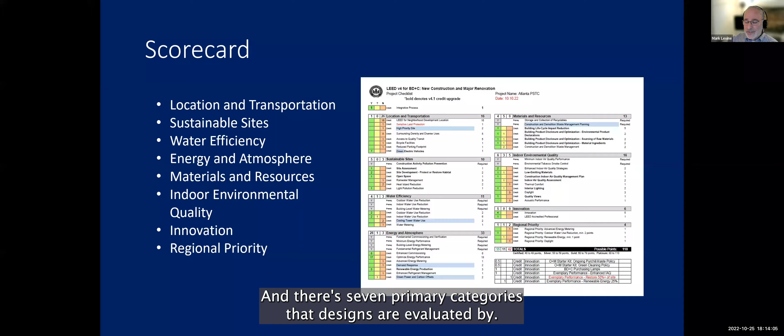Our project is going to be registered with the U.S. Green Building Council, and it follows a prescriptive process that includes a project checklist, which you see here on the right. There are seven primary categories that designs are evaluated by. It's a totally comprehensive approach to design that encompasses everything from site development to indoor air quality. There are four categories of certification: LEED Certified, LEED Silver, Gold, and Platinum. We're going to touch on some of these seven categories in the presentation tonight.

We go through a fairly meticulous process, and it begins with a series of what we call charrettes, which is really a fancy architect word for design session. During these sessions, the team determines priorities from the owners' and users' perspectives, and we set a path forward to achieve the desired results. Here's a picture of our initial goal-setting charrette, led by Lane Adams, who is LS3P's sustainability leader. The meeting included representatives from the city, the foundation, and the entire consultant team.

So at this point, I want to turn it over to Bob, and he'll talk about the process of design leading to where we are today and today's master plan.

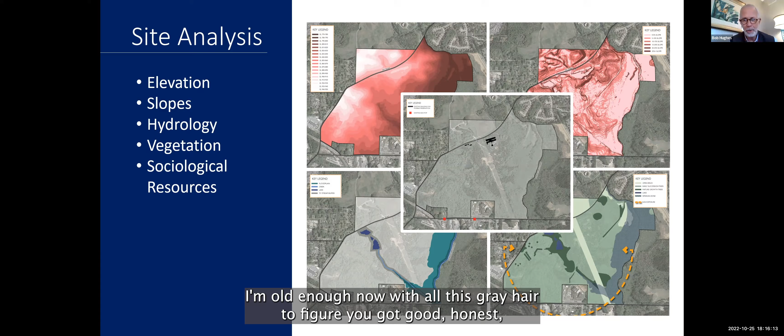Bob: Thanks, Mark. I'm going to take us back to one of our early meetings where we presented this work. I want to remind us how starting with a sustainable attitude, really starting with the earth we're building on and working with that land, has helped shape the plan. In addition, there's the sociological resources, the community itself, and how your input has helped shape this plan. It's a combination of knowing what we're dealing with the land, being open, frank, and honest in our communications, and looking for the best answer. I think over time, with good, honest, working people and good, honest communications, you're going to come up with the best answer, wherever that comes from.

So we looked at the slopes, we looked at elevation change, the cultural resources, hydrology in the lower left, and the types of vegetation that was on the site, from the nicer hardwood to the invasive species to riparian zones down by the river, the creek, all of these things that we looked at and put them together.

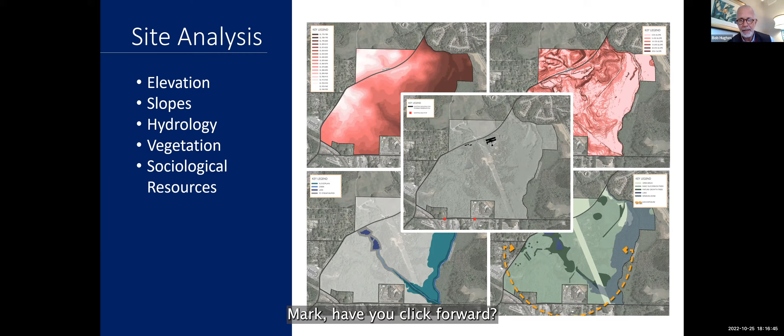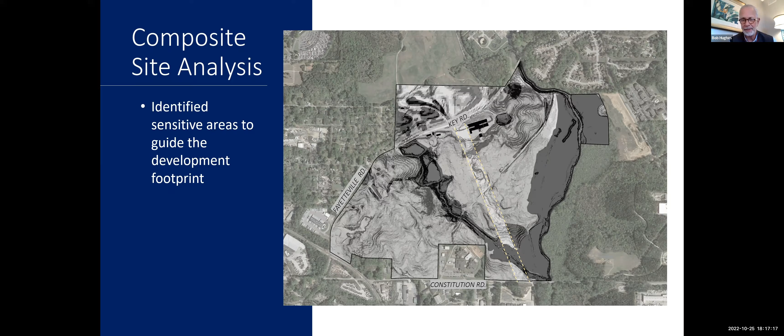Mark, if you click forward, recall this comprehensive analysis where each component, steepness of slope, type of vegetation, is ranked from least vulnerable to most vulnerable. Where they get the darkest in this overlay system, it represents the most environmentally sensitive parts of the property. So it's a very simple roadmap that says try and preserve as much of this as you can and build as much as you can in the lighter areas.

So we took the early conceptual plan that was done several years ago, and we said now that we have real topo and real information, let's lay it over the top of that. And if y'all recall, we were all over the place, up and down hills, into some nice areas. So we took that concept and said, how does that change and bend with the information we have now? How are we guided by that site?

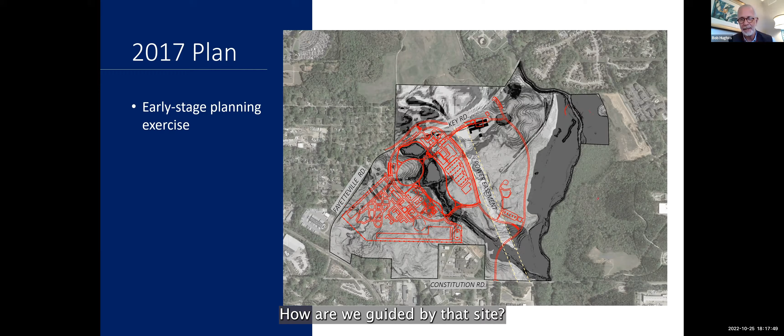So the next thing we did was say, you know what, we can begin to change this to fit more like this and be away from the sensitive areas, preserve the steeper slopes, the better vegetation, the cultural resource components to it.

But one of the things y'all asked us as we did this is, why do you really need to come across off Key Road? There's an issue of traffic that, quite honestly, we hadn't really focused on the way y'all were asking us to focus on it. And we said, I don't know, let us look at it.

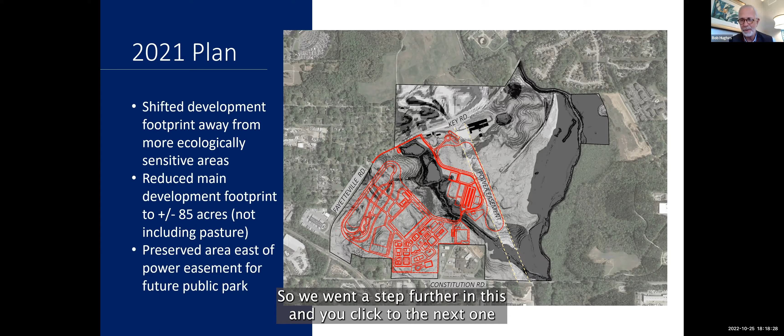And so we went a step further in this. And we modified it all again, where the stables, that Mark will talk about in a little bit, are kind of picturesque up on Key Road itself. And the main entrance is shifted to come across Constitution.

So, that to me is sustainability, not only in the sense of environmental sustainability, but community sustainability. Everybody's always listening, everybody's always trying to say, how do we modify this and make it even a little bit better? So that really led our big moves, our big site plan components on this.

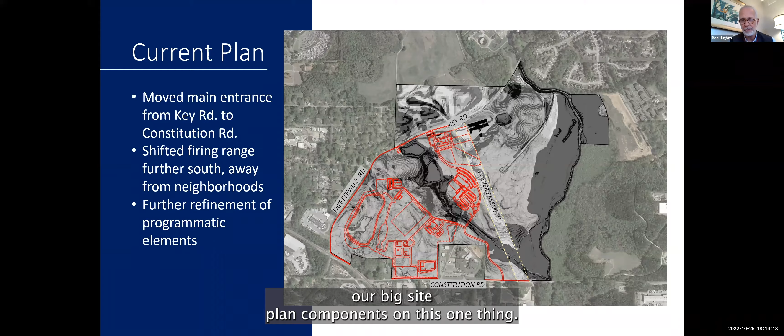One thing, if you click ahead, Mark, remember the order. Yes, good. I do have the order right.

One of the things we'll do from a sustainability standpoint is use native plant material in restoring this site. And what we do is look at all of the different kinds of plants that are native, and we look at them. Why will we use them? For screening qualities, for their bloom, for their fall color, for their pollination ability.

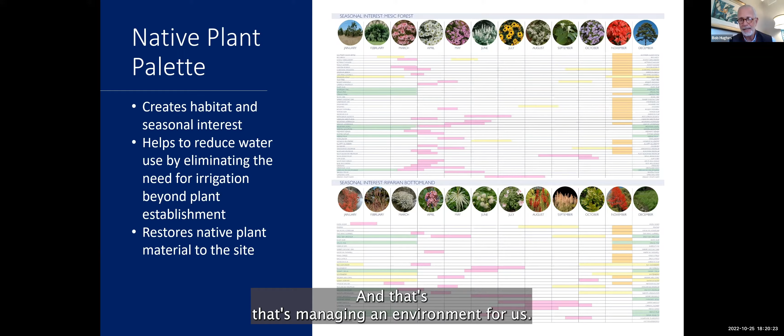So each of them becomes part of a system of what we refer to now as not just the pretty landscape, the landscape that we want to be in, but the landscape that's doing a better job of purifying our air, getting rainwater into the ground and reducing runoff and water usage that we have, and creating the kind of food cover and pollination opportunities that really lets nature do what nature does best, and that's manage an environment for us.

We take this palette, and we'll begin to look at the site itself to say, okay, where have we disturbed things on the site? Where have we preserved things on the site? What can we do to augment? Because some of the landscape out there is nice and some of it we know is invasive species. So can we remove those and restore with native plant material, and begin to look at how all that layers into the design?

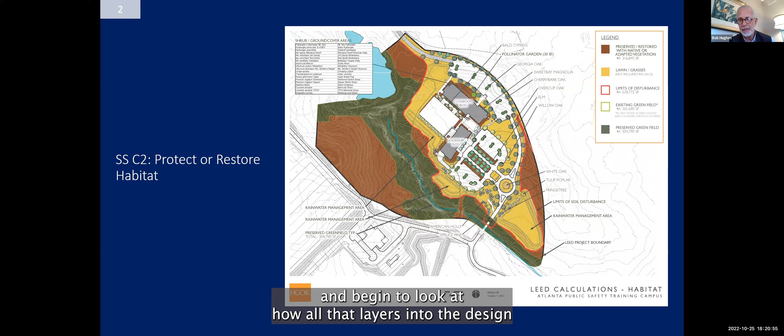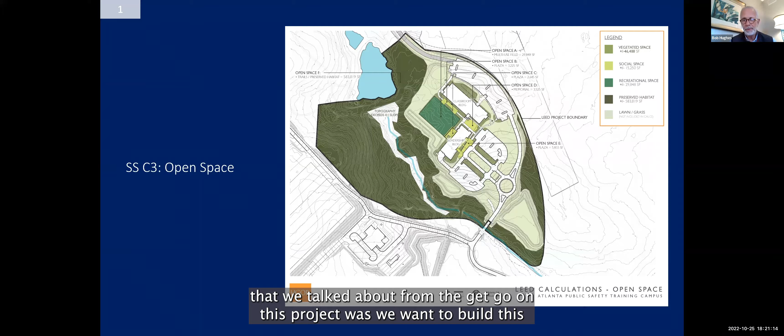And then how we begin to use the open space. One of the key things you'll see here is looking at this notion of social space and recreational space. Because one of the things that we talked about from the get-go on this project was we want this to be the kind of place that the community can come out here and use it on the weekends, right?

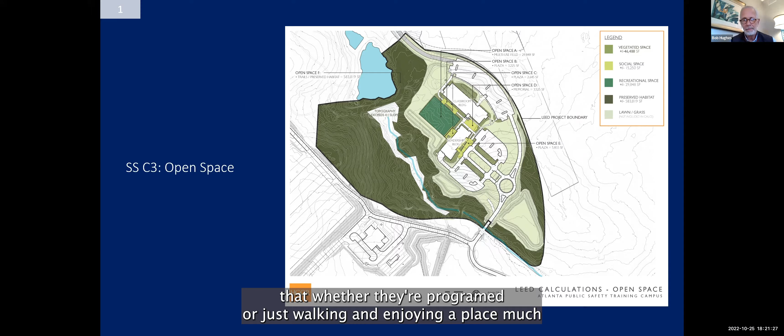There are activities, whether they're programmed or just walking and enjoying a place, much as people who live next to an academic campus go and walk and use that campus. So it really has that social structure to it.

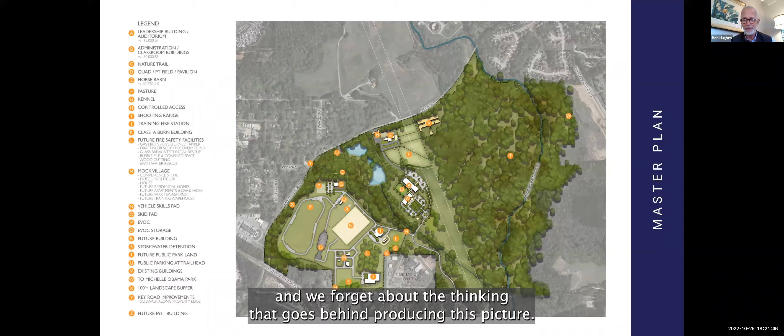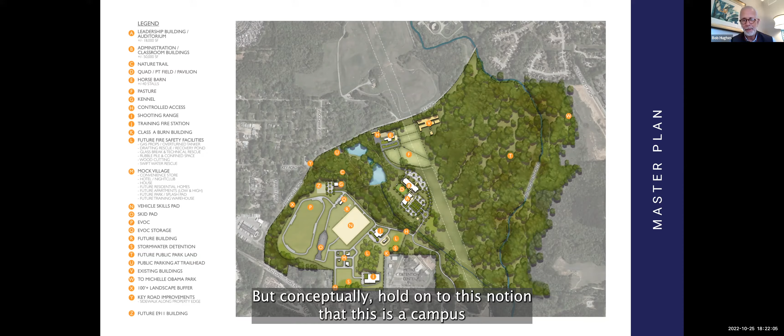When we put all that together, we're back to this illustrative master plan. Sometimes we get lost looking at the pretty picture and forget about the thinking that goes behind producing it. It's been an absolute joy to work with this committee through this process to validate parts of it, adjust parts of it, but conceptually hold on to this notion that this is a campus that is phase one of potentially a larger idea. That's another little teaser about the video we're going to show you at the end.

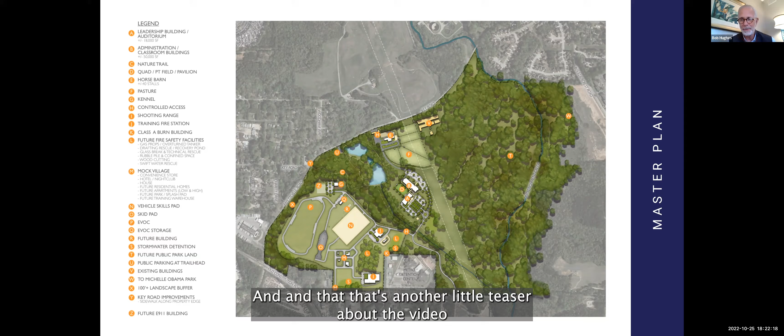So Mark, I think I hand it back to you here to talk a little more. Yeah, thank you, Bob. Appreciate it.

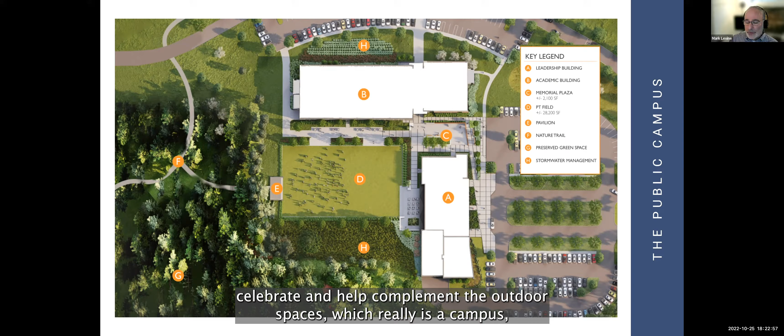I want to talk to you about the public campus, which is really what we call the campus core, and how the buildings are sited. They're intentionally designed to speak to each other, with a similar aesthetic, which I'll show you in a second. There's an intentionality to the axes created throughout the site, through the circulation, how we bring the public into the site and navigate throughout it, and how the buildings celebrate and complement the outdoor spaces, which really is a campus, and just as important, if not more important sometimes, than the buildings themselves.

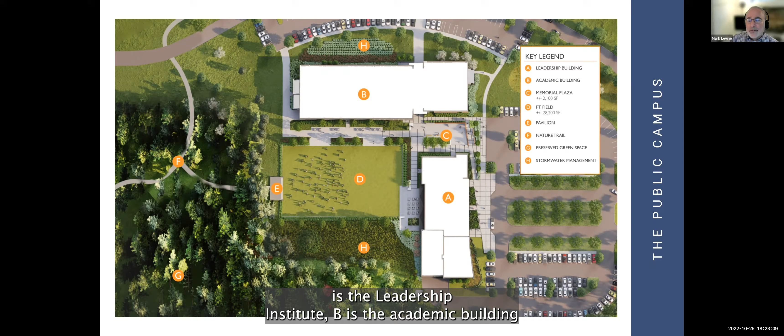I want to point out in this diagram, if you look at A and B, A is the Leadership Institute, B is the academic building. That represents about 50,000 square feet of roof area, and there's a proposal to put a solar array, solar panels on this roof. I'm going to speak to that in a bit and show you the impact of what that potentially could mean.

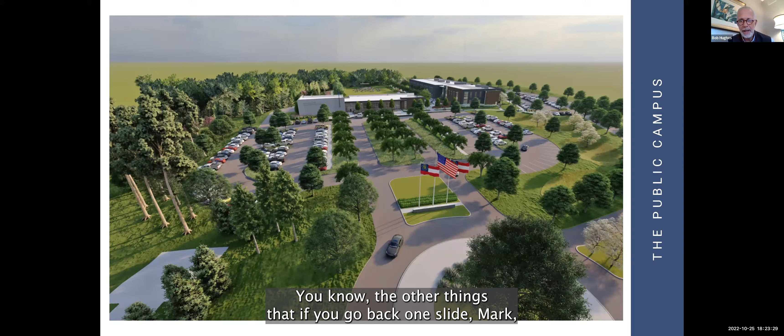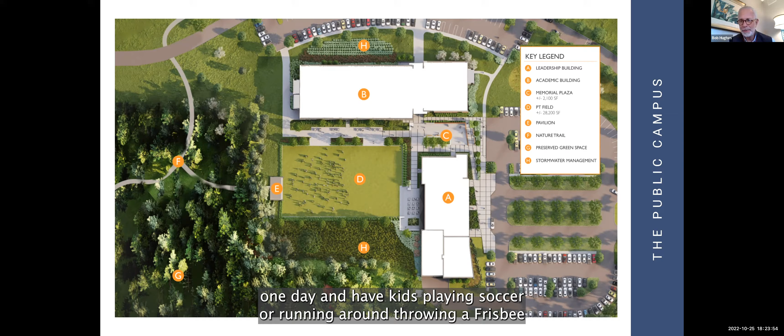If you look at D and E, D is really a field used from an academy standpoint, and E is the idea of a pavilion that is a dual pavilion - it's a park pavilion, and it's a pavilion for when you have graduation, potentially to have events out there. That field could have cadets on it one day and have kids playing soccer or running around throwing a frisbee or whatever they want to do on a Saturday or a Sunday.

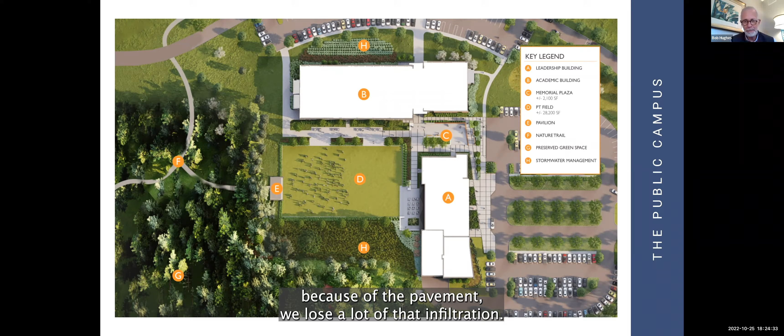Woven into this, where it says stormwater management, this is where we're working to do infiltration of the stormwater back into the earth. The importance of that is during periods of drought, the more water we have in the earth and the groundwater table, the less affected plant material and habitat is when we get into a drought period. In urban areas, because of the pavement, we lose a lot of that infiltration, and here we're trying to get it back.

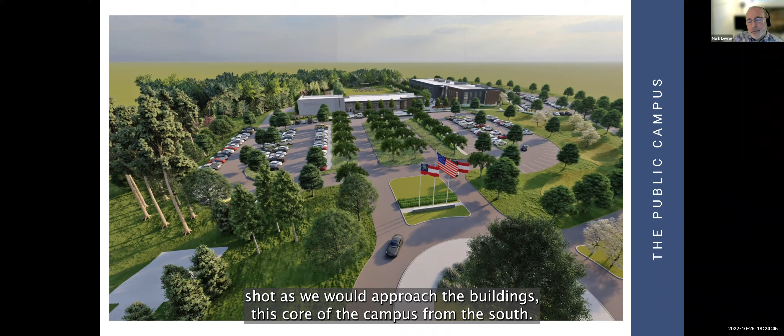This is what you're looking at is an approach shot as we would approach the buildings, this core of the campus from the south.

I think there's just a simplicity here of what will be big shade trees that lead the way in. There's an academy to this - and when I think of the word academy, I think of a certain simplicity and a certain restraint and discipline. The landscape here shows that, but it also creates a humanness to the arriving at the site, and all those begin to work together.

We've also been very intentional to break up what could be potentially a big parking lot into several smaller parking lots and incorporate stormwater management and greenery in those islands as well.

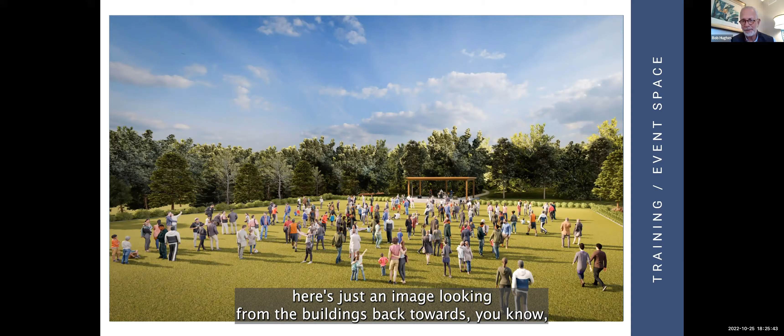Here's just an image looking from the buildings back towards a placeholder of a pavilion there, and the idea that there's any number of events that they can have out here.

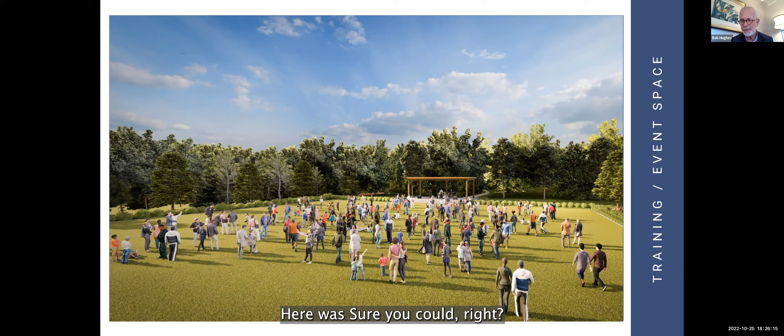We often say spaces like this, if you think about plays, every great play that's ever been done has been done on the same flat platform. You bring in the lighting, you bring in the stage setting, and you're transported somewhere. So just creating something simple here where someone in the community says, gosh, could we do this here? Well, sure you could, right? So it really becomes that interactive part.

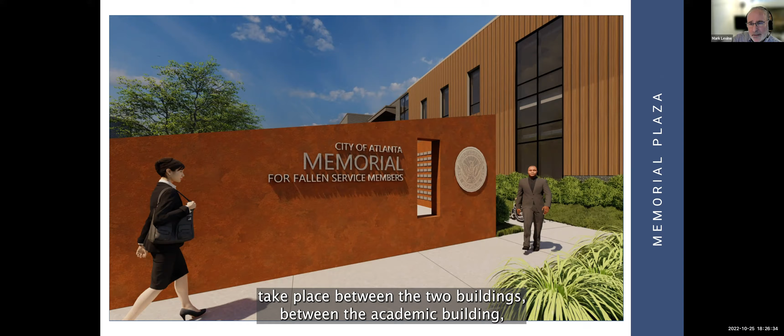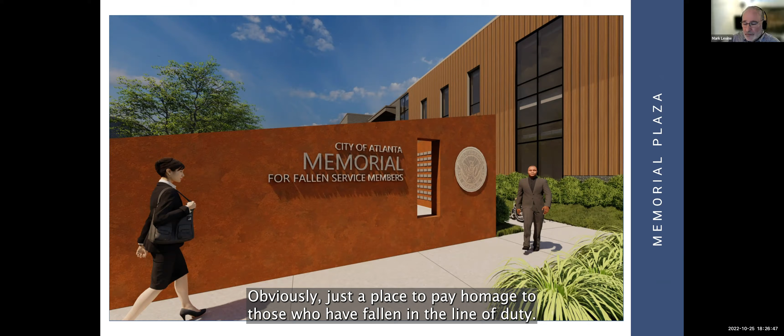Then there's the memorial, which we've spoken to in the past. Right now there's a memorial plaza hopefully going to take place between the two buildings, the academic building and the community building, reaching both of those. You'll see in upcoming visuals how they connect. It's a place to pay homage to those who have fallen in the line of duty, a place of reflection for families and visitors in the community.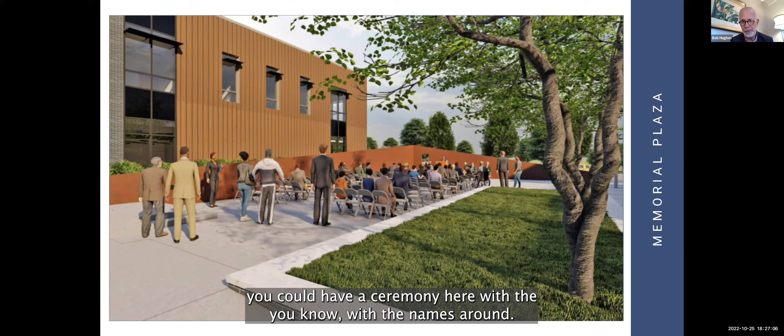It becomes a flexible space too. It might be very introspective at times, but you could also have a ceremony here with the names around. This is really past, present, and future all together.

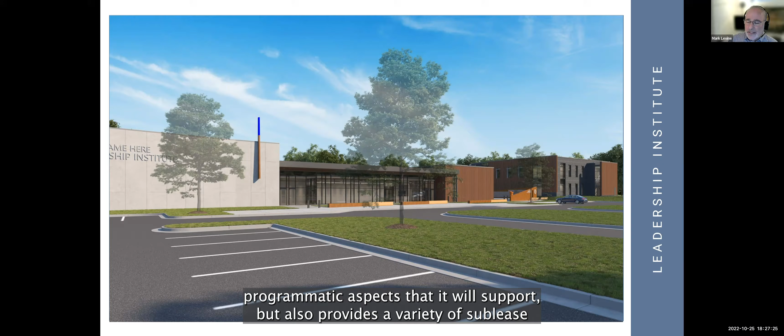This is the front door, basically the front of the Leadership Institute, which supports programmatic aspects but also provides a variety of assembly spaces and functions for gatherings. It's a place the community is going to be able to use. It's very transparent, very accessible.

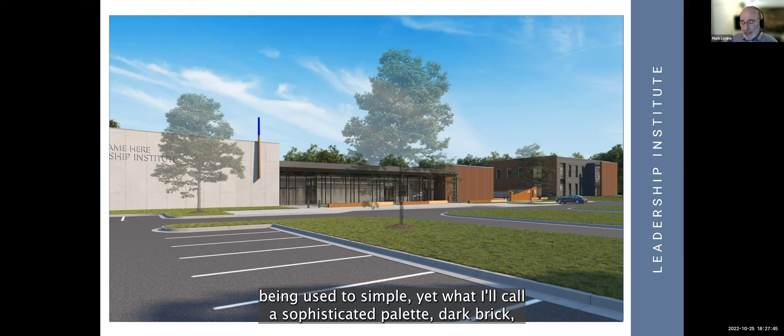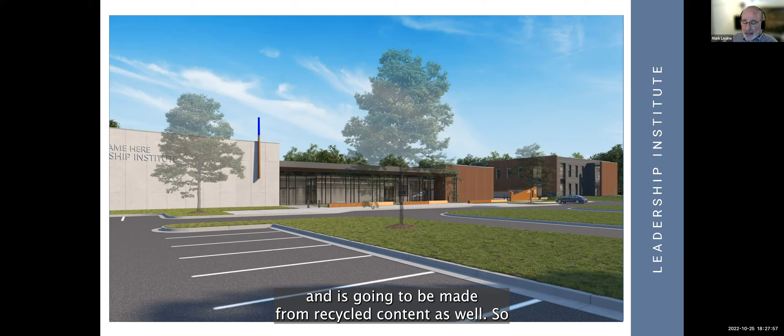You're seeing the academic building to the right, that two-story structure. You can start to see the common language of materials being used, a sophisticated palette, dark brick which is intentional to take a backdrop to the landscape, and simulated wood exterior siding that is durable, low maintenance, aesthetically pleasing, and made from recycled content as well.

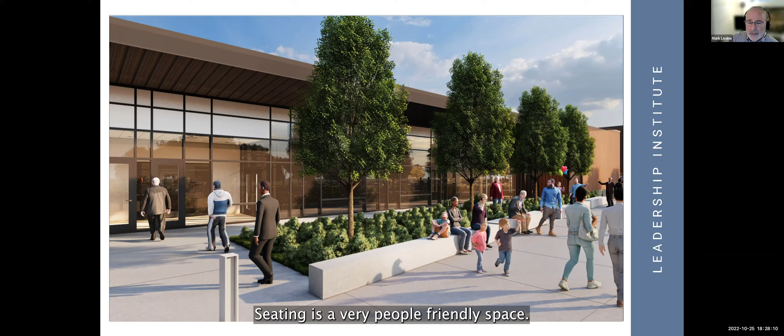This is an up-close main entrance to the Leadership Institute. It's welcoming, there's planters, seating, it's a very people-friendly space.

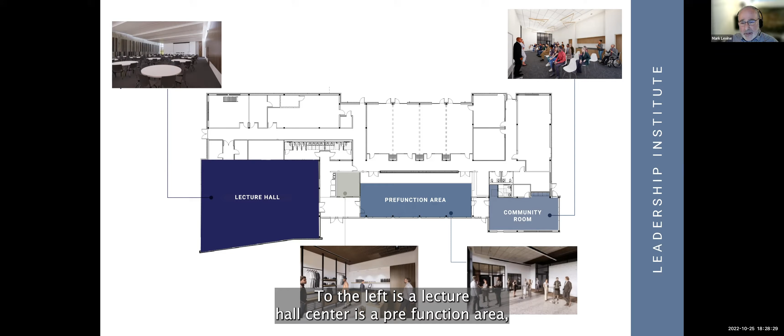I wanted to highlight a few of the areas the community is going to be able to use. You're looking at a floor plan of the Leadership Institute. To the left is a lecture hall, center is the pre-function area, which is the image I just showed you, and the community room to the right.

This is the pre-function area, or the main entrance lobby, if you will. It's very bright, very welcoming. There's a nod to the site through the use of what we call environmental graphics, which you can see in the back of this space.

To the left is a concept for an exhibit. I believe Tony or others have spoken to you about this in the past, and I know you all started to speak about this in prior meetings. We're not proposing to further that discussion tonight, but just wanted to show you how the architecture can create a backdrop to help tell a story, whatever that story may be. We'll speak more about this toward the end of the presentation with the video.

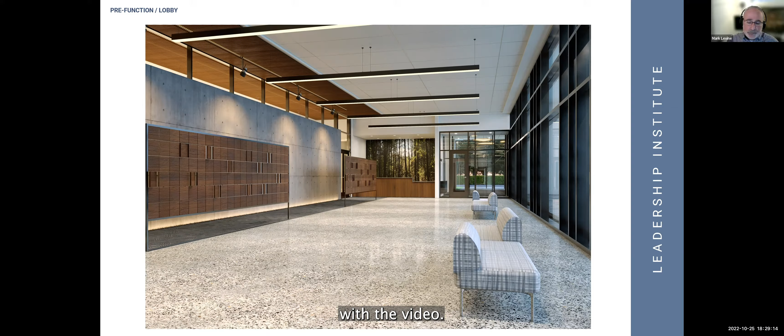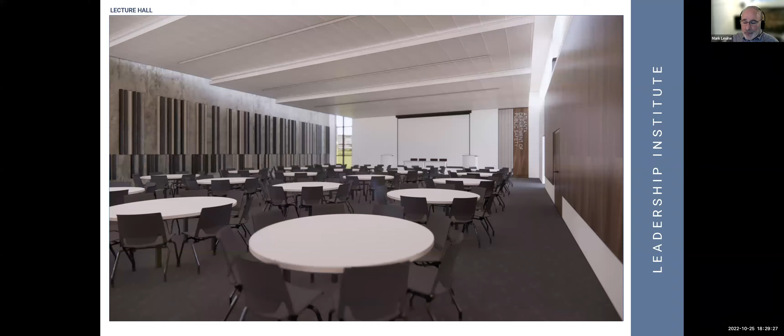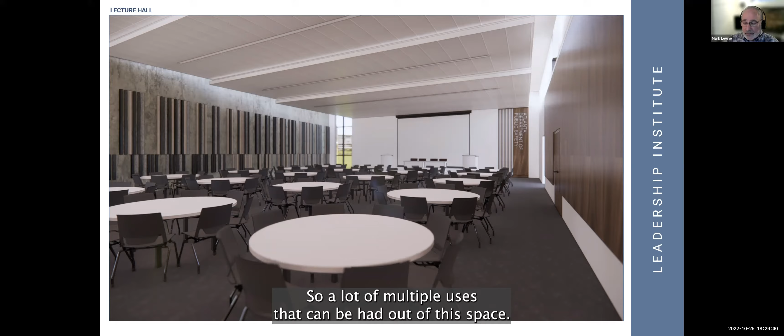This is the lecture hall, sophisticated finishes, acoustical treatment. It can accommodate approximately 200, and it's able to accommodate a variety of uses, whether lecture style, classroom style, or banquets. So a lot of multiple uses can be had out of this space. I'm excited about this space and to talk to you about this.

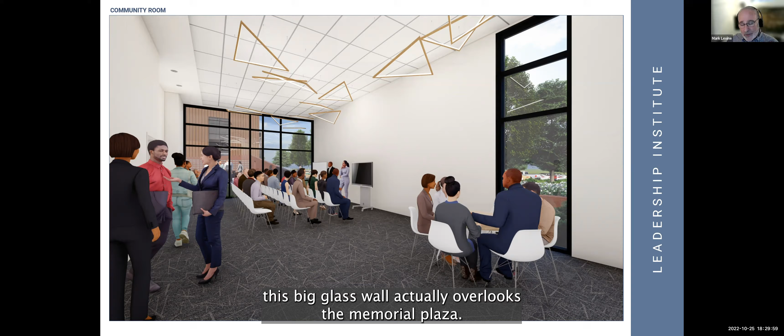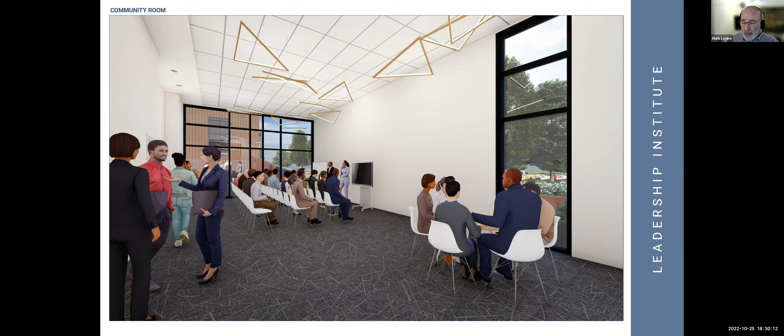This is the community room, front and center on the leadership building as you approach from the campus side. It's for the neighborhood to use. It's very transparent, has a connection to the outdoors. You can see on the left this big glass wall actually overlooks the Memorial Plaza. There'll be provisions for multimedia, and it can be zoned off from the remaining portion of the facility so you can use it after hours, not unlike a fire station multipurpose room. It even has its own restroom, so you can totally isolate and have a nice function in there. Lots of nice volume—you could probably accommodate up to 50 people comfortably.

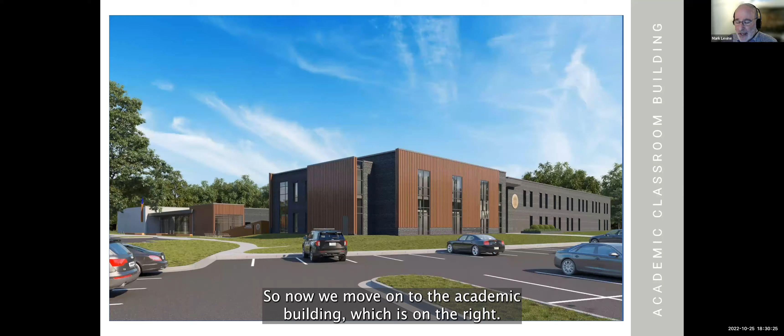Now we move on to the academic building, which is on the right. This is not unlike a facility you may find at a college campus or a technical college. Again, the materials palette is very subdued, consistent with the Leadership Institute on the left.

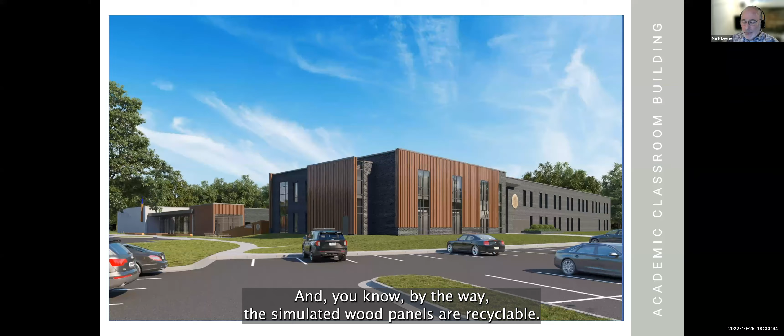By the way, the simulated wood panels are recyclable, I think I mentioned that. And the brick is actually regionally sourced from Columbia, South Carolina, which is going to keep shipping costs down. All of these are in support of the LEED certification.

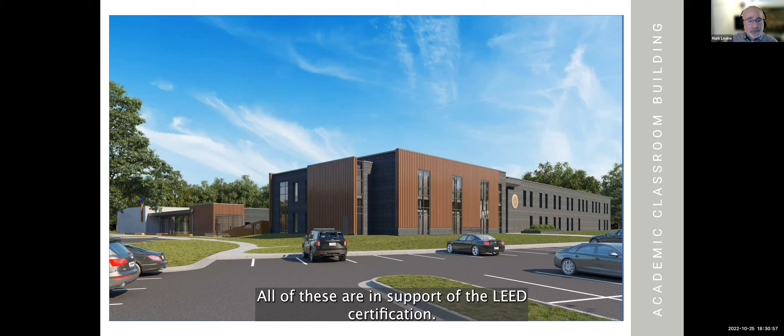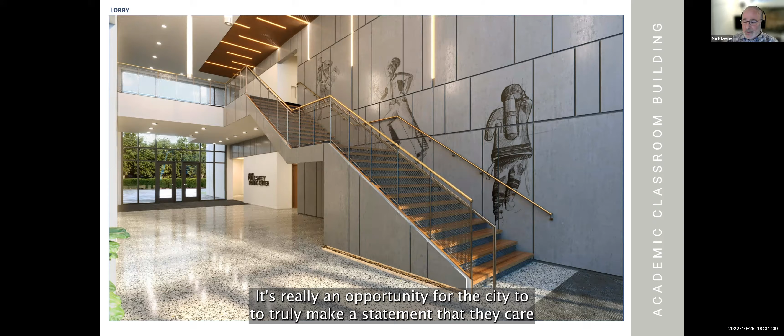This is the lobby, and this is the first impression that Police and Fire Academy recruits will experience when they come to this complex. It's really an opportunity for the city to truly make a statement that they care about the importance of the commitment of these individuals and their mission.

Marshall, I'd like to invite you. Do you want to say anything to this? Because I know this is an important space to you.

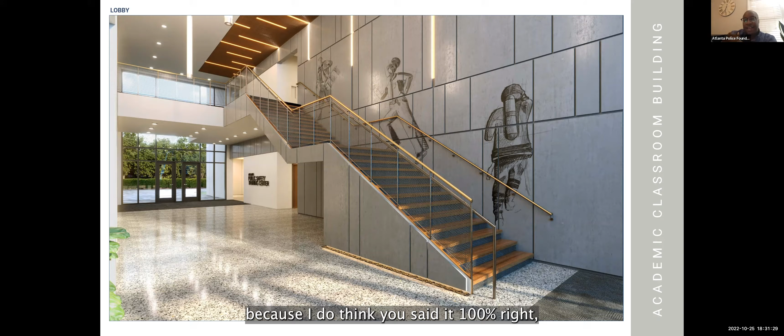Yeah, as soon as it came up, it just warmed my heart again, because I do think you said it 100% right, Mark, that this is that thing that we've been talking all this time about this facility.

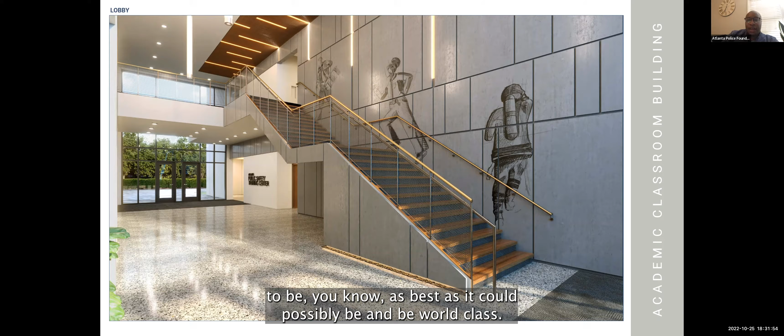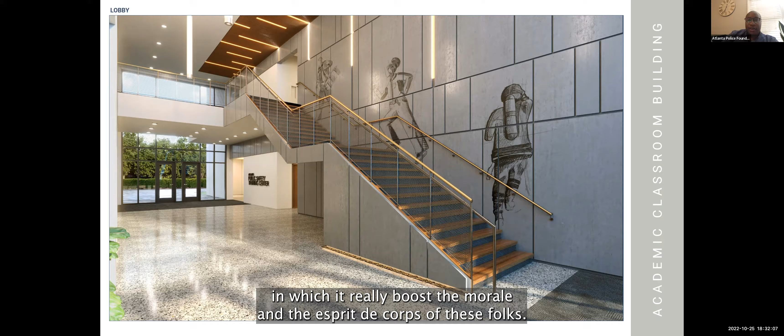When you take a step back and think about why we're doing this, it's so we can have public safety professionals serving the community with pride. We've demanded that service be as best as it could possibly be and world-class, and we're demanding a lot from these folks. I believe we're building this facility in a manner that boosts the morale and esprit de corps of these folks. It's exciting to see it come together.

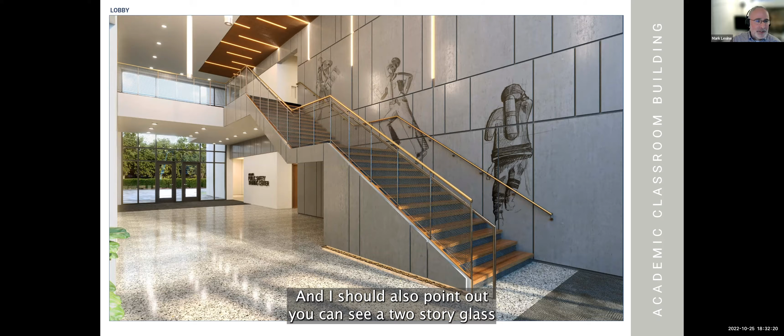This is hands down one of my favorite shots of the interior of the academic building. You can see a two-story glass wall on both ends of this lobby, a strong connection to the outdoors from these primary spaces throughout, really celebrating the connection of building to environment. This is a typical classroom in the building, not unlike anything you'd see at a four-year college institution. It'll be complete with technology, a flexible, versatile educational learning space.

We also have a series of computer labs and flexible spaces. There's actually a partition down the middle of this space, which you can divide up into smaller spaces, or you can accommodate a larger assembly if necessary.

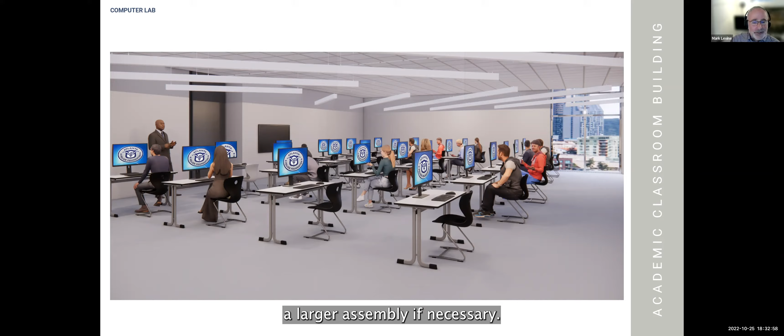Not unlike the lobby, the fitness center is an important space on the first floor. These are the types of spaces that help foster pride from within the force, and again, are very important recruitment tools.

I'd actually say, if the Chief is on the call—Chief, you're seeing this stuff, any thoughts you might have? No, I'm just like everybody else.

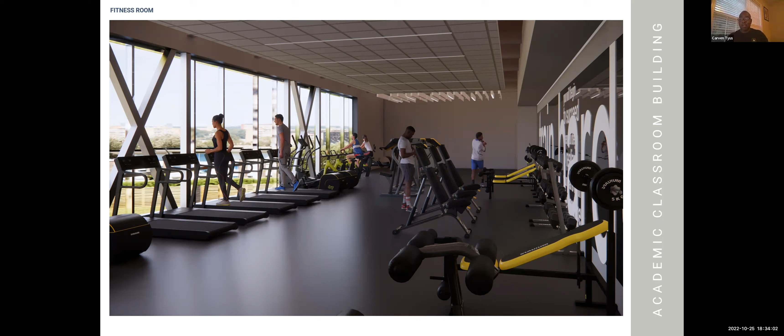I'm ecstatic by these designs, and I'm grateful that it's incorporating our vision as a police department and as a fire department, but also respectful of the community that has so graciously allowed us to come in and be a part of it, and just grow a world-class organization. I'm grateful for the partnership, because we couldn't be here without you all agreeing to it. This is a shared vision. Thank you all for putting the time in, Mark, and thank you for listening to our needs as a department, but also listening to the needs of the community and bringing it all together. So thank you.

Appreciate the words. Again, on the left you can see expanses of glass and connection to the outdoors—in this case, at the entrance to the academic building. Recruits coming in will see the fitness center. These are the kind of spaces that get them energized.

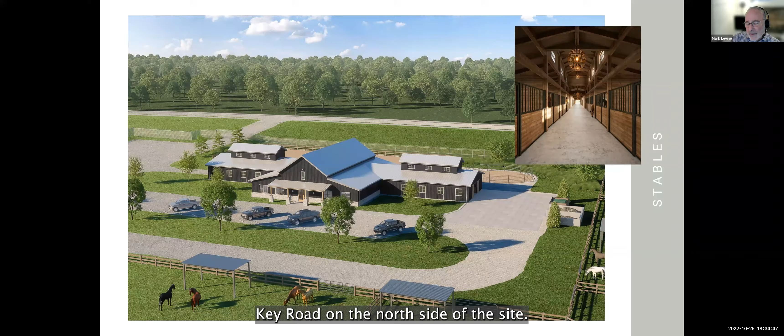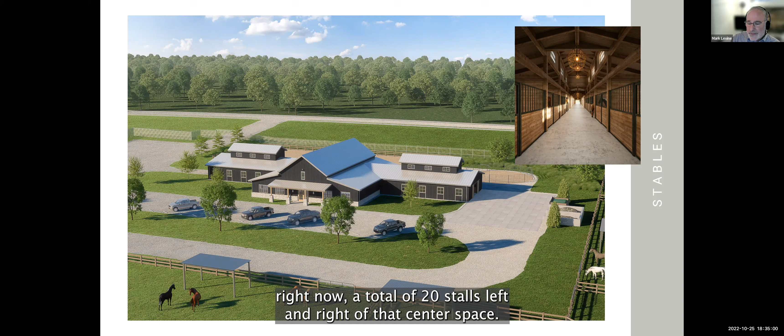Something completely different—this is the stables for the mounted patrol. As Bob mentioned, this is located along Key Road on the north side of the site. It's a simple agrarian barn, with support spaces in the middle of the facility and stalls, a total of 20 stalls, left and right of that center space. The color palette is designed to blend in with the other structures and take a backdrop to the landscape.

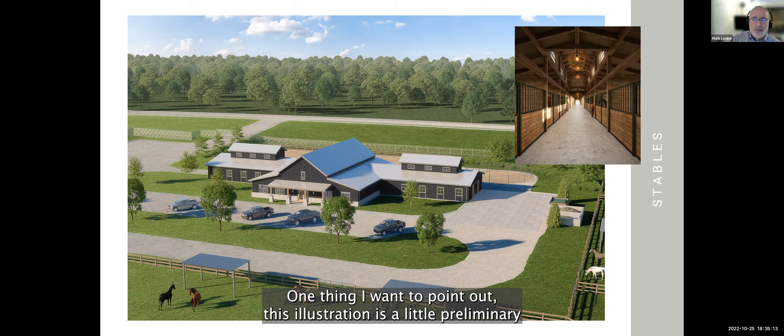One thing to point out—this illustration is a little preliminary. You can see Key Road to the north on the upper end of the drawing, and there's a space between that and the stables that will actually be a wooded area; we just haven't added the trees yet. So there will still be separation between that and Key Road and the neighborhood. You can also see a snippet of what the inside of the stables might look like.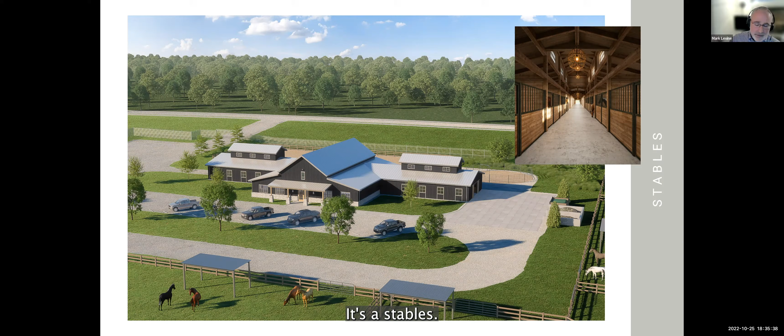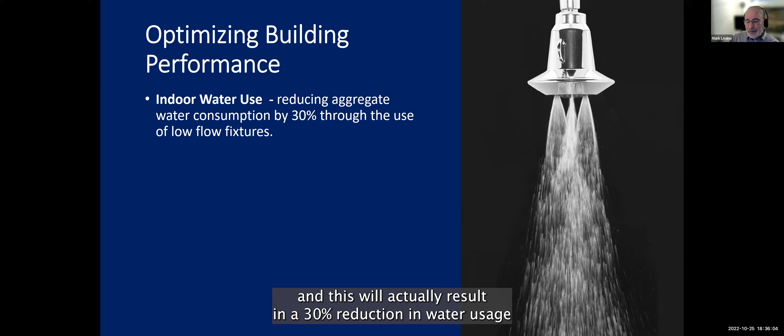Back to addressing how the design team is promoting sustainability in the buildings, I'll quickly mention a few key areas we're focusing on. First, the buildings will use low-flow plumbing fixtures throughout the project, resulting in a 30% reduction in water usage over traditional fixtures.

The building will have what we call a high-performance envelope with high R-values, meaning a very well-insulated exterior envelope, the skin of the building. Combined with renewable energy sources, as we've discussed, possibly including solar, this will result in energy savings upwards of 45%, a pretty significant number.

Further optimizing building performance, I want to mention the use of renewable energy. The leadership and academic buildings are designed to accommodate a rooftop solar array, which when implemented, will provide the electrical equivalent to power 27 homes over the course of a year. That's what I call responsible design.

Another aspect of sustainable design has to do with promoting health and well-being beyond energy consumption. The buildings are really designed to promote health and wellness, and by doing so, we help optimize the interior environment, resulting in enhanced productivity and learning. An example: it's been proven in schools that simple access to daylight raises student performance over 20%, with fewer sick days.